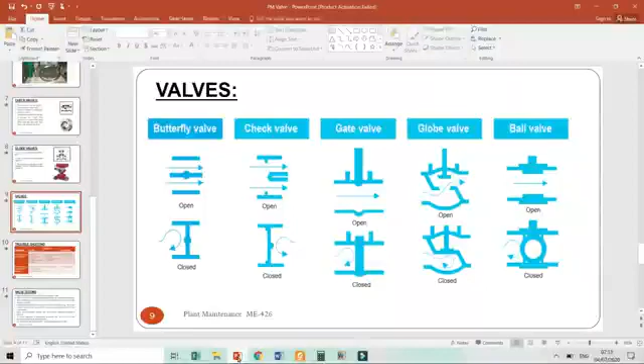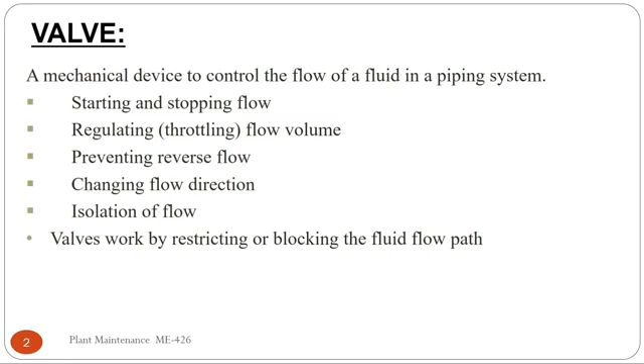In the last lecture we started the maintenance of valves. Today we will continue and conclude it. In the last lecture we went through what is a valve, the different types of valve, and saw videos of different types such as ball valve, gate valve, and butterfly valve.

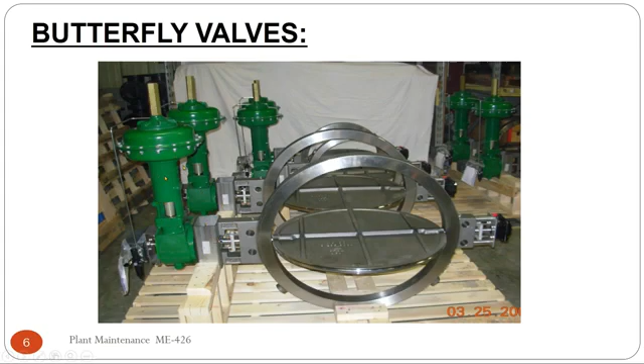There is one additional picture. This is the view of the butterfly valve. As can be seen, this is an automatic butterfly valve, meaning it is controlled by an automatic instrumentation system.

Now in the last lecture we also saw the globe valve and its video. This is basically a comparative chart of different types of valves showing the open and closed positions.

In the butterfly valve, since we have a butterfly disc, this is open and this is closed position. For the check valve, as the flow comes from left to right, this is open position and this is closed position. For the gate valve, we have a gate or disc; the gate sits in this position - this is open position, this is closed position.

In the globe valve we have two changes in pressure. There is a harsh pressure drop compared to other valves, so the flow comes through with one pressure drop, then a second pressure drop. The globe valve has a conical or sphere-type disc, so the chances of erosion are less compared to the gate valve. That is the reason why the gate valve is not used for partial open or partial closed positions - it is used for fully open or fully closed position.

Or maybe due to corrosion, which may be due to several reasons, or wear. As wear increases, let's take the example of a gate valve - the gate valve disc's actual position is this, but due to wear out, this portion of the gate valve wears away. So when the gate valve sits in closed position, this portion remains open due to wear, and the valve will not close 100%, so there is some flow of fluid.

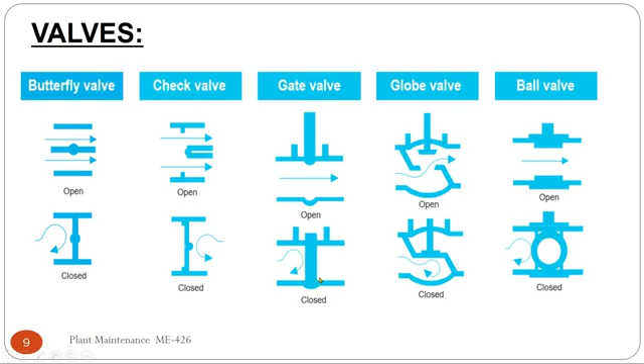Flange or flange bolt failure. As we have the flange installed here, if it is not properly tied or sealed, there is leakage from here. This is a common cause in industry - leakage from the flange, maybe due to gasket failure, bolts not properly sealed, or gasket material not being compatible. So there are several different reasons.

There are chances that the product, let's say take an example that in the oil storage tank there is diesel. The valve is installed on the suction side. If the valve is passing, and from the back end side we have a common line, on one side we have diesel, on one side we have crude, so there is a chance that the crude will go inside the tank and the product will be lost.

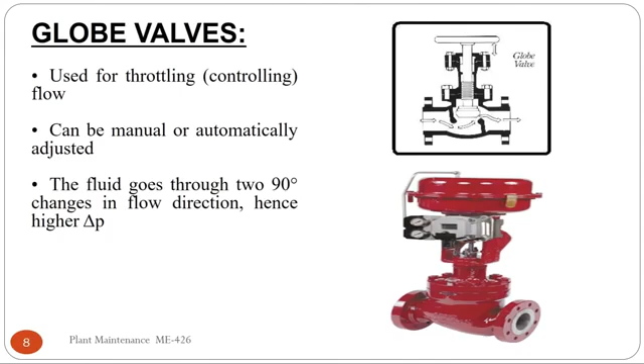As you can see here, there are threads. Let's say this valve is installed in an 83 or 100 acre area, so there are hundreds of valves. Like in PSO oil storage terminal in Port Qasim, there is an 8 kilometer, 12 inch pipeline. So there are hundreds of valves, approximately 400 or 500 valves installed in our locality, in our plant, of different sizes ranging from half inch to 48 inch diameter.

So there are 1 or 2 people continuously, as we do not have a maintenance team, we have technicians. Technicians go do cleaning first of all. This is the main point, because if the threads have dust and dirt, then when you open the handle, there is a chance that after some time the threads will get damaged. So first of all you have to clean these threads.

Then do greasing and oiling, and there is one common thing, or you can call it jugaad. As we have seen, the packing of flour, atta or rice - this packing is very useful in industry, because we normally wrap the packing or wrap other cloth on this portion so that dust and dirt will not come here.

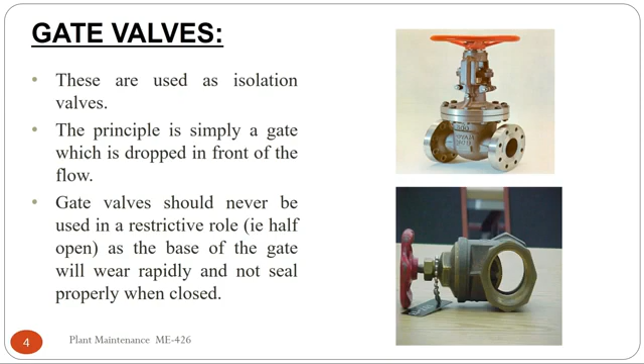Now, attempt to flush - what is the possible reason? If there is contamination of the product, first attempt to flush, and the other solutions are to tighten the gasket, tighten the nut bolt. If the problem is not solved, then change the gasket. We will see in videos later in this lecture how to change and tighten the gasket, how to tighten the gland. This is a common problem in the industry.

Valve not operating correctly - ball and whatever, corrosion of internal parts, foreign material, corrosion of handle. So the effects will be that the valve is not sealing properly. If the ball is corroded or eroded, then there is a chance it will not operate correctly.

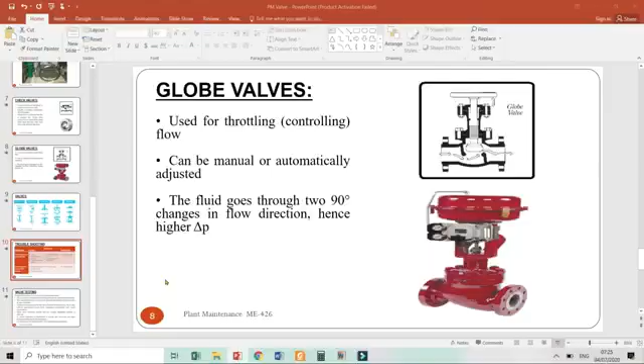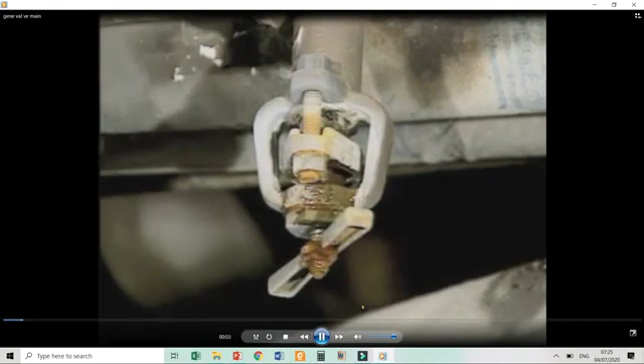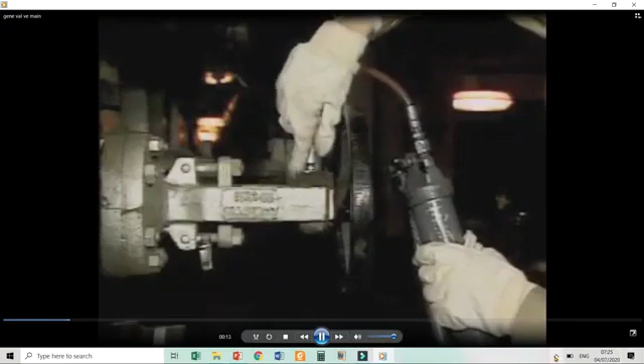Now let's see some general videos of valve maintenance. Valves, like many other components, require routine maintenance and are susceptible to mechanical problems. In this part of the program, we're going to look at one type of valve problem, a leak, and then look at a routine maintenance task an operator may have to perform to keep valves operating properly, such as when a valve's packing becomes worn.

Now what is this guy doing? He is pouring the grease using a grease gun. As I said in the lecture, greasing and oiling are necessary, so this guy is greasing the valve.

You can see on each instrument, motor, and pump there are points for pouring grease or oil. This is a manual handling grease gun, and this guy is pouring the grease into the valve.

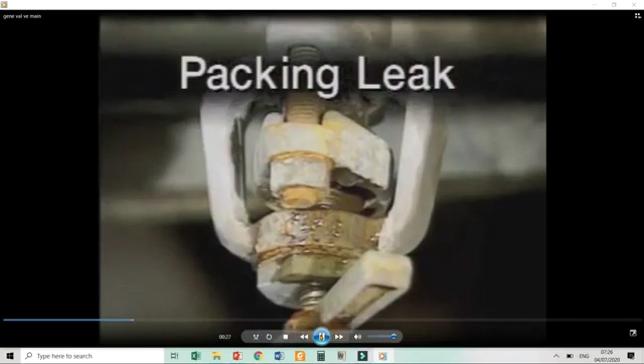This is a maintenance task an operator may have to perform to keep valves operating properly. If a valve's packing becomes worn or fails completely, fluid will leak out around the stem. This type of leak is commonly referred to as a packing leak. In most valves, the packing can be adjusted to stop minor packing leaks.

Packing is adjusted by alternately tightening the packing gland nuts. This is basically a gland nut. As this guy is saying, it's common practice in industry to tighten the gland nut, or after some time you have to change the packing inside, below the gland. You must not over-tighten the gland, as it will damage it.

Usually a quarter turn each at a time. This ensures that the packing gland doesn't become cocked in the stuffing box as the gland nuts are tightened.

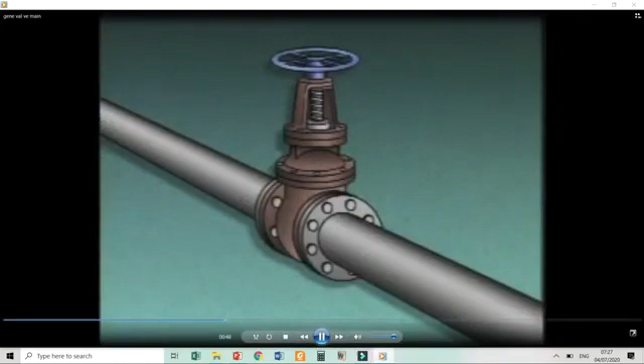The packing is not the only place where a valve may leak. Another place is the joint where the bonnet of the valve attaches to the body. This is the bonnet, this is the body. A leak in this area is commonly referred to as a body-to-bonnet leak.

Still another place that valves can leak is where the body of the valve attaches to the piping system. On valve bodies with flanges, this leak is commonly called a flange leak. This is a flange leak.

On valves that are attached to piping using methods other than flanged connections, this leak may simply be called a connection leak. In a flange leak, it's common that the gasket is damaged or deteriorated, or that you have over-tightened the nut.

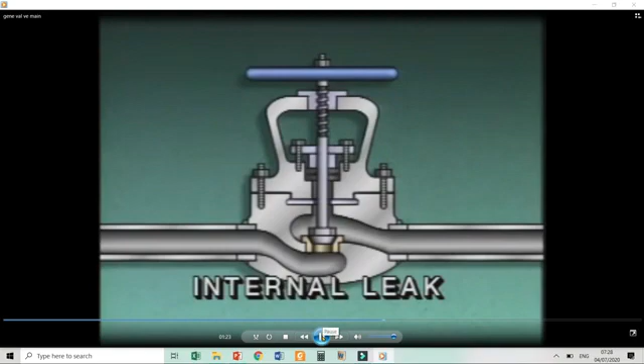The final leak we're going to look at, and one that is not so obvious, is an internal leak through a valve. As the valve disc and seat wear, fluid may begin to leak by the seat when the valve is fully closed. When this happens, the valve is said to be leaking through.

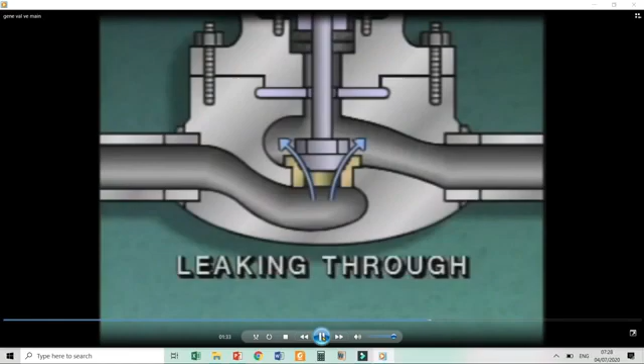This leak can be detected only by carefully observing plant instrumentation or conditions on both sides of the valve.

Besides locating and identifying leaks, another task an operator may have to perform is valve lubrication. Valves need lubrication to prevent components from wearing during operation. Each type of valve may require a different type of lubricant or method to apply it.

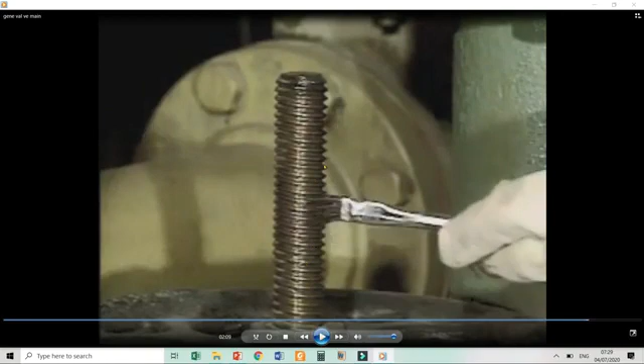For example, some valves have grease fittings and require a grease gun to lubricate them, while others may have lubricant applied directly to a component such as the valve stem. This is a thread; this person is cleaning the threads first, then applying the grease.

Because there are so many different methods that may be used to apply lubricant, you should always check your company's procedures before lubricating a valve.

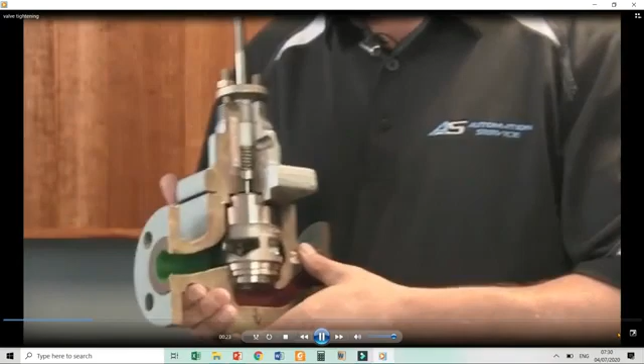Hi, I'm Jerry Boots, Director of Engineering at Automation Service. I want to talk to you today about one simple way to extend the life of your control valve, and that's packing maintenance. Valve packing is a component in a valve that forms a pressure seal between the inside and outside of the valve, keeping the process fluid from leaking out.

Over time, the packing will wear, relax, or loosen with process temperature or even seasonal ambient temperatures, and begin to leak. Any process fluid that leaks out of a valve can be costly, messy, and even harmful to health and the environment. The most important thing is to catch the packing leak early and address it before it causes further damage.

In the early stages of packing failure, it may be difficult to detect the process fluid coming out of the packing box unless you're very attentive and keeping an eye on the valve. But the leak is only going to worsen. Here we are at a typical valve location. I'm going to show you how to detect and correct a packing leak.

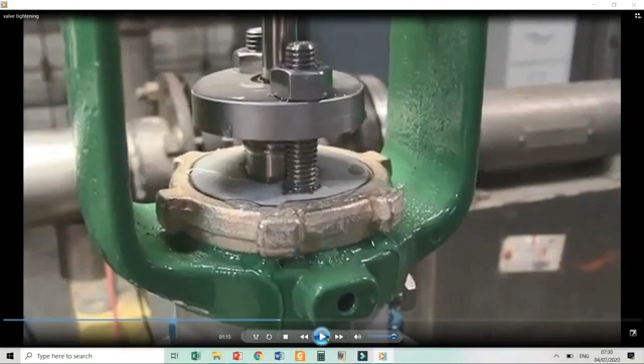As can be seen here, there is a leakage of water or liquid from the valve. We see water weeping out around the packing and the valve stem. When you first notice this sort of leak, attempt to correct it by carefully tightening the packing nuts.

I will use a 3/4 inch combination wrench and tighten the packing ever so slightly. It doesn't take much, just enough to seal the leak again. Be sure to tighten the nuts evenly and do not over tighten, or you could interfere with the actuator's ability to stroke the valve. When you see the leak has stopped, you've fixed it.

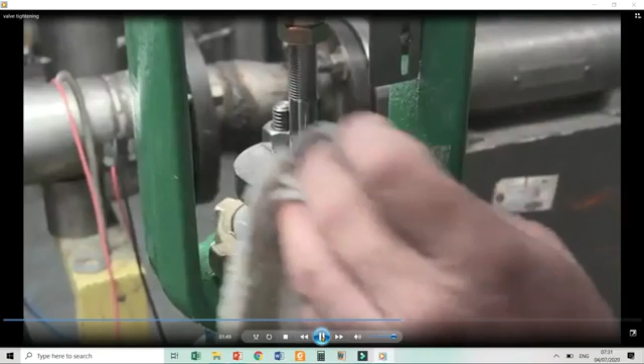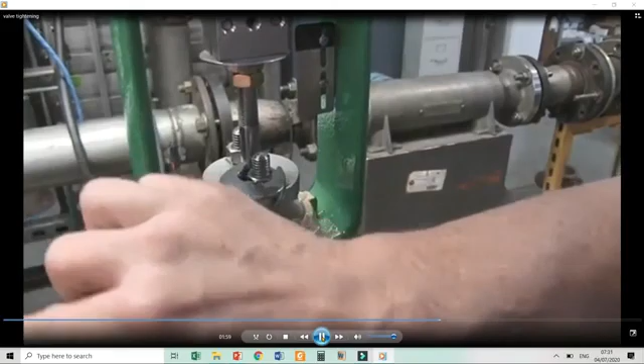Now if you find you have to use a fair amount of torque to tighten the packing nuts, you may be at the end of the adjustment and cannot tighten the packing any further. That means it's time to replace the packing set.

Replacing the packing in the valve would typically involve removing the valve from service and disassembling the actuator from the valve, and then separating the valve bonnet and body to completely access the packing box. Although this is a fairly easy task, you should refer to your product instruction manual for step-by-step directions.

This is the most important point: if you are maintaining any valve, first of all refer to the instruction manual of the valve or the standard operating procedure for maintenance of the valve, or consult with your account representative about how we can take care of that for you.

There are a multitude of other maintenance tasks that you can and should do with your control valves. But packing maintenance is probably the easiest and most cost-effective step you can take to extend the life of your control valve. If you do nothing else with the valve, keep the packing in good health.

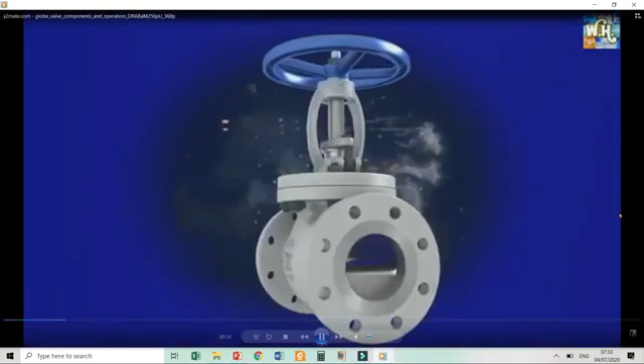Now we will see other videos as well. This is the second video of the globe valve. This is the body of the globe valve.

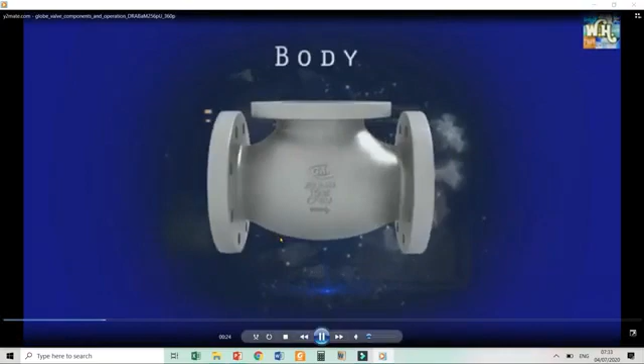What is this showing? 200 mm. 200 mm divided by 25, because 1 inch is 25 mm, so this is 8 inch, 150 class. The flow direction is in this direction.

Stem, disc, nut. As can be seen, it is in a conical shape. The disc is in the conical shape, but on the gate valve we have a gate.

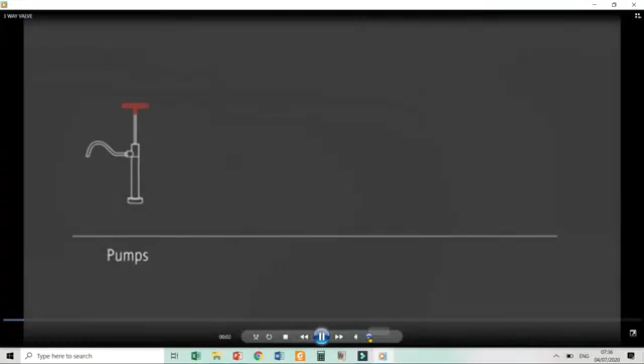This is a three-way valve. You have seen this valve in gas, power plant, water treatment, on which we have a control system, and there is a three-way valve installed.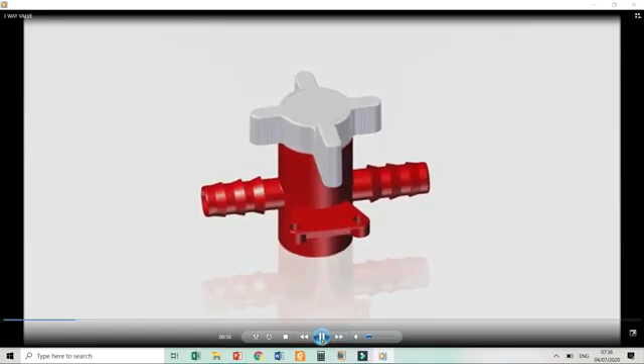There is no flow, there is straight flow. When we turn it, the flow is closed.

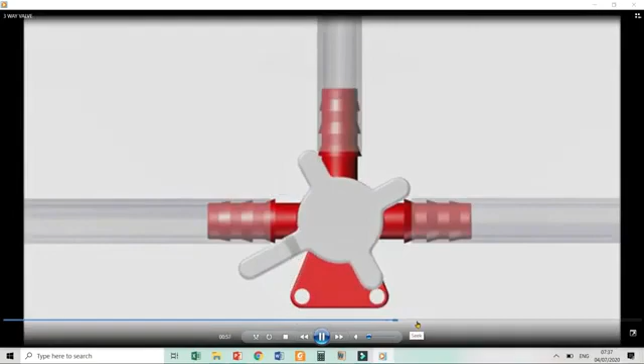So it is very helpful.

Safety relief valve, pressure relief valve, relieves pressure more quickly than a relief valve. Their design and components are very similar.

The direct acting safety valve is made up of a casing, inlet, outlet, disc, seat, spindle.

As you have seen in power plants, steam vapor boilers, the pressure relief valve is installed on the discharge side of the pump, so that if there is excess pressure, then it can cap it.

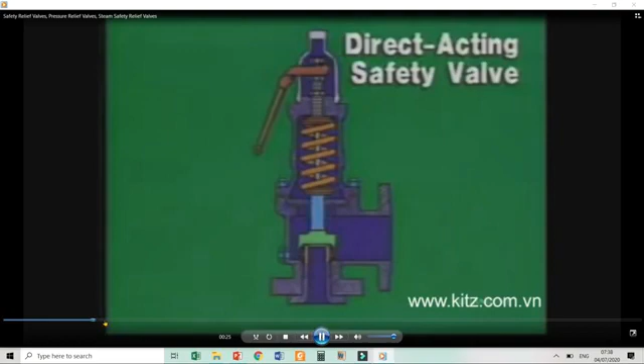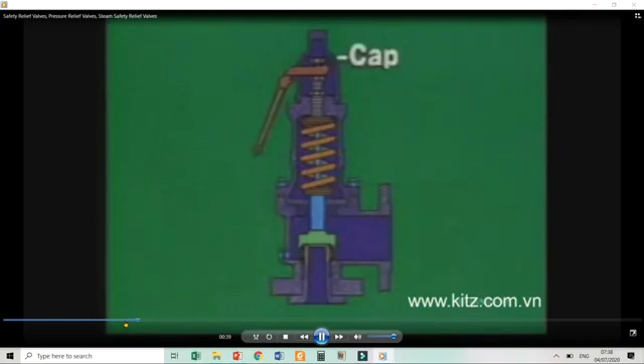The safety valve assembly is protected by the casing, which is threaded or flanged for connection to the system. A cap covers the top of it. The disc is held in place until the system pressure increases to the point when the disc opens.

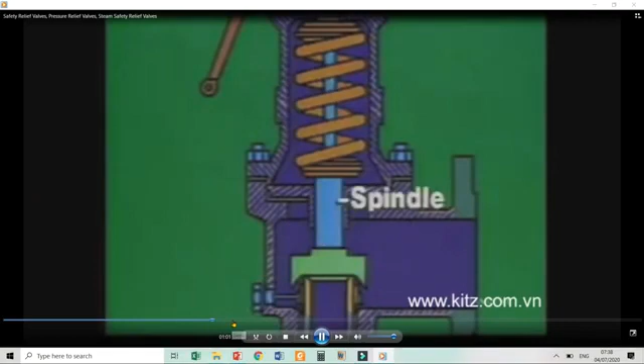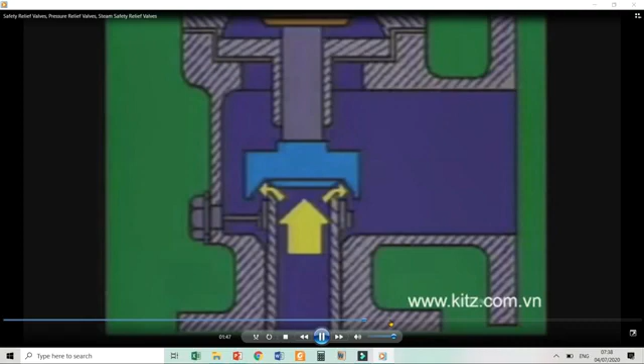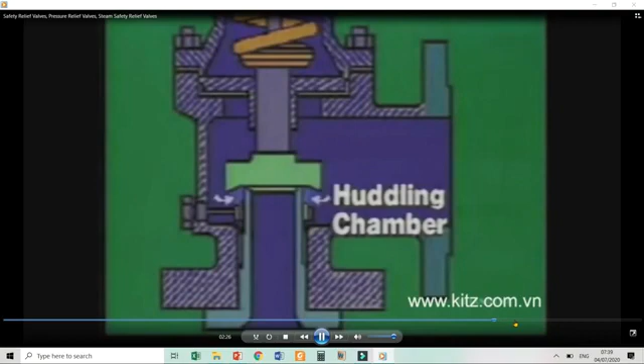The opposite, rapid closure of the valve: the popping pressure is 200 psi and the reseating pressure is 190 psi. The blowdown is 10 psi.

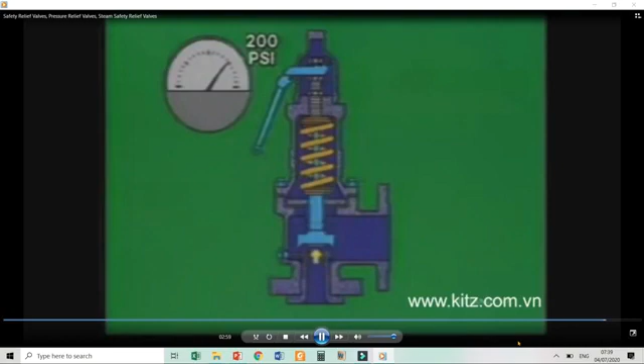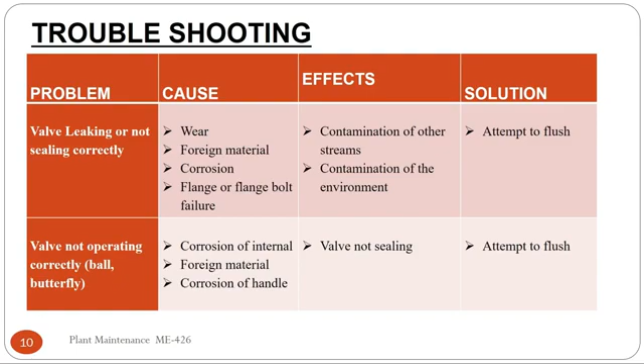There is an important thing to keep in mind: as I have said in my lecture, valves range from half inch or 1 inch to 48 inch sizes. As the size of the valve increases, the force required to open the valve increases. So normally for bigger valves, 20 inch, 24 inch, it is helpful that the valve be automatically opened, or an instrumentation and control system be used. So there is a motor mounted on it. We can have push on and off buttons so that we can open or close it for ease of maintenance.

Now the last topic of valve maintenance is valve testing. There are different types of valve testing methods. For details, you can see API standard 598, valve inspection and testing.

In valve testing, a typical hydrostatic valve test follows these steps. This is similar to the boiler hydrostatic testing procedure you have learned in power plant engineering. First, the valve body is filled with a testing fluid at the specified temperature. Testing fluid means if you are using the valve for water, use water, or if you have to install the valve on a petroleum product, then use petrol at the specified temperature. We will see a video as well, but it will be of not hydrostatic testing, but air testing.

The specified pressure is applied for a specified length of time, usually at least 1 minute. First fill the fluid, then apply the specified pressure. Let's say the valve is designed for 200 psi, then the testing pressure is 1.5 times the design pressure, so we have to apply 300 psi and retain it for 1 minute.

After 1 minute, check for leakage across the different elements, leakage across the valve, and do a visual inspection as well. If there is no leakage, it is okay. Most valves specify that no visually detectable leakage is allowed. A visual inspection is performed to ensure the valve has not been damaged during the testing process. So: fill the fluid, apply the pressure, retain it for 1 minute, check for leakage across different elements, and if there is no visible leakage, then it is okay.

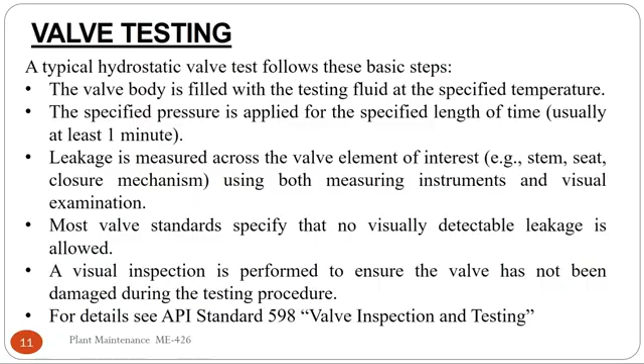Now, this is simply a gate valve. The pressure gauge is installed here. This is a flange connection on the right side, the black metal piece. This is a flange connection, and this is another flange. This test is applied using not water, but air. We learned the water procedure; a similar procedure can be applied for air as well. First, we close the flange.

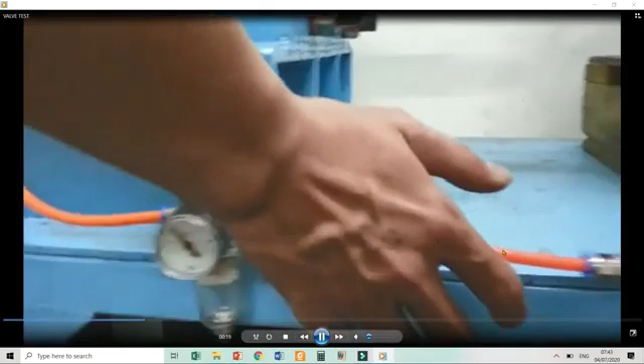Then we start applying the air pressure, as shown on the gauge. They open the valve and now the air pressure is applied. What is the purpose of this valve? This valve is used to remove the air from the system, first it is opened so air can go out, then this valve is closed. Now we start applying the air pressure.

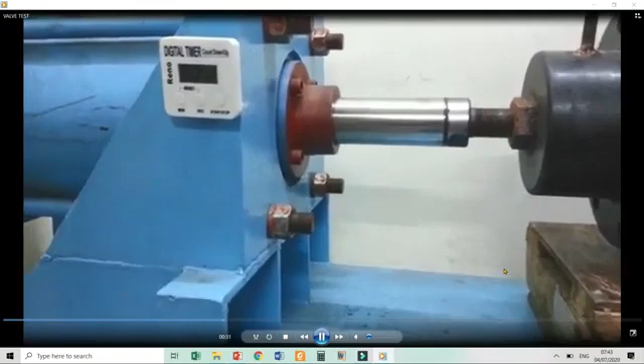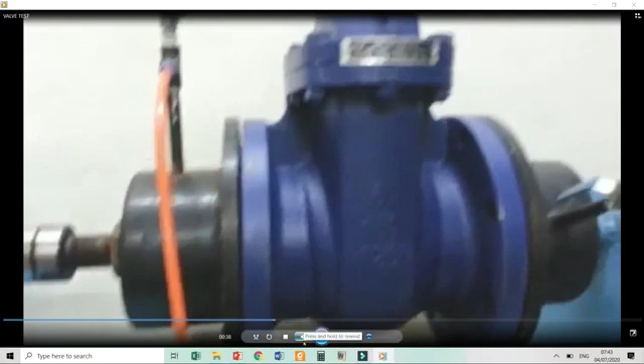This is a timer, because time is necessary for the testing. They have started the stopwatch from 1 minute and it is moving towards 0. This is the pressure gauge; the pressure must be 0 here, because if there is leakage the pressure will increase on the discharge side. Now this is a valve, cast iron body, valve size 6 inch or 8 inch model. This is the connection; these details are written on the valve.

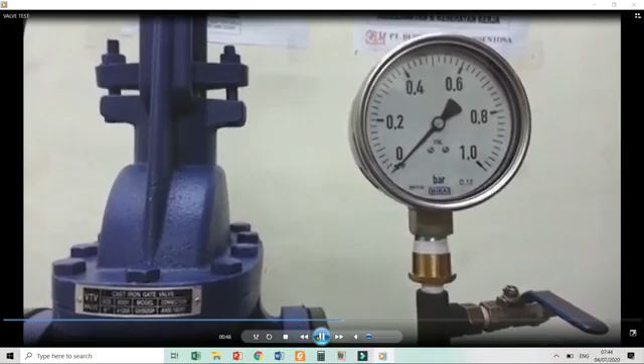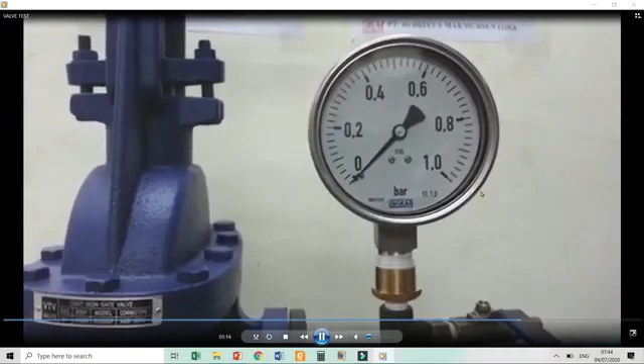Pressure is applied at approximately 2.3 to 3.5 bar. There is no pressure increase on the discharge side, which means there is no leakage.